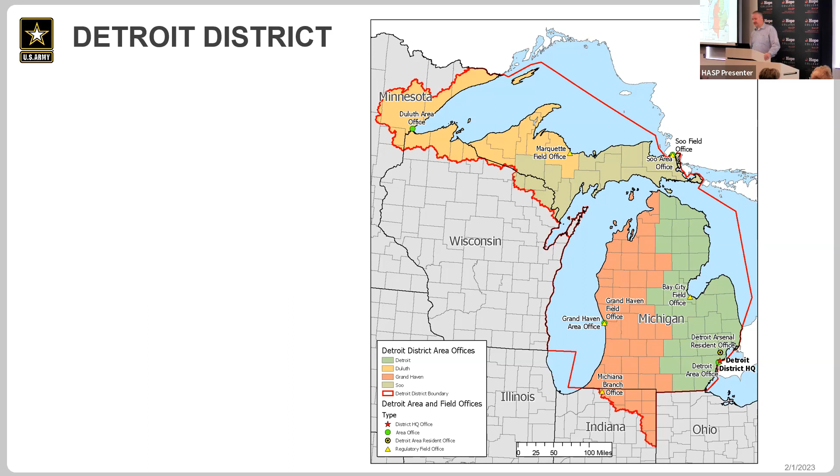We have an office in Bay City, and Sault Ste. Marie, if you've ever been there, the Soo Locks facility - that is the Detroit District's largest project, and I'll have a little bit more on that later. We have a large field office up there with about 100 plus people at it. We also have an office in Marquette, Michigan, and then Duluth, Minnesota.

Before I get into missions, I want to talk about how the Corps of Engineers is able to do work. In order for the Corps to get involved in a project, we need an authorization from Congress. So Congress comes out with bills, for the Corps of Engineers, about every 2 years.

A Water Resources Development Act is developed, and within that are laws that allow the Corps of Engineers to do work. It doesn't reset everything when the new WRDA comes out - it adds on to the existing laws that we have. They could strike through and say this law is no longer active and here's the new one. But typically, we'll get a few new authorizations each year under that Water Resources Development Act.

I'll give you a quick example. Within the state of Michigan, the Corps of Engineers had an authority to assist with combined sewer separation. If you're familiar with sewers, we have sanitary sewer, which is when you flush your toilet, it typically goes down the sanitary sewer, and storm sewers that carry rainwater. In combined systems, the sanitary and the stormwater are all combined into one system. So when you get a large rain event, that water could dump out into your rivers and ultimately your Great Lakes.

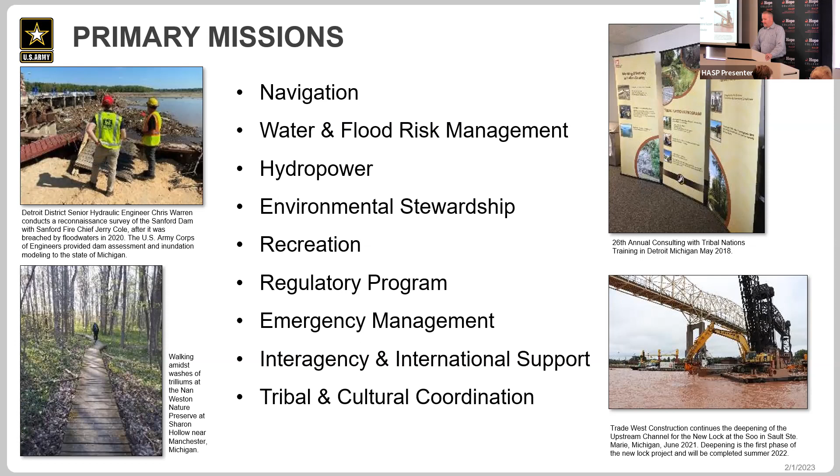And then, last but not least, cultural and tribal coordination. We work a lot with tribes and the state historic preservation offices and folks like that to make sure that the projects we're doing are not impacting those sensitive cultural and tribal properties.

All right, I'm going to start zipping through here—I think we've got about 5 minutes left already.

All right, so navigation—I'm not going to get into this, John's going to talk about this quite a bit, but there are many harbors along the Great Lakes. Again, when we dredge these, it's by an appropriation from Congress. So we have standing authorities to dredge all of the federal harbors, but we don't dredge all of them on a regular basis, because Congress appropriates funds for those typically based on the amount of commercial traffic coming through, or those large freighters that you see. I'll save the rest for John.

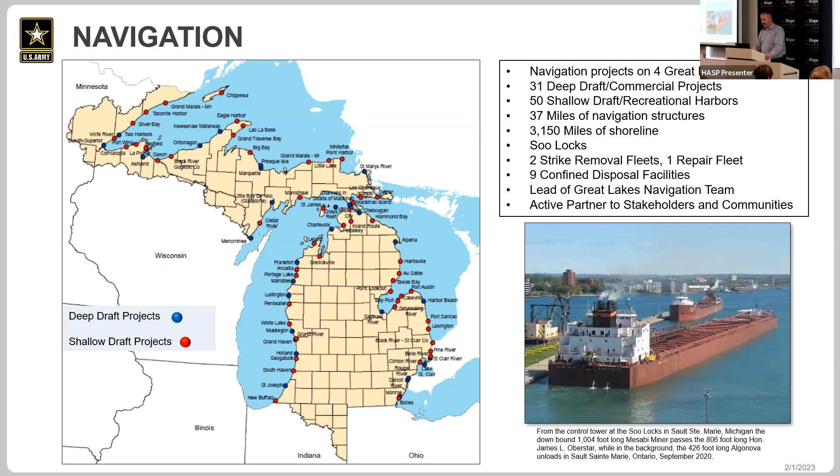Again, flood risk management, I kind of hit on this. We do monitor and forecast water levels on the Great Lakes, so if you're interested in what those levels have been and where we think they're going, you can look at our website and there's information on water levels there.

We also get into inspecting levees and flood protection projects like that. Under our flood risk management program, we also have the ability to construct new flood risk management projects. A lot of our projects, in order to qualify, have to be economically justified—so we're not going to build a levee to protect a park that's flooding. There would have to be a lot of homes or larger public facilities impacted in order for the Corps to have justification to construct a project like that.

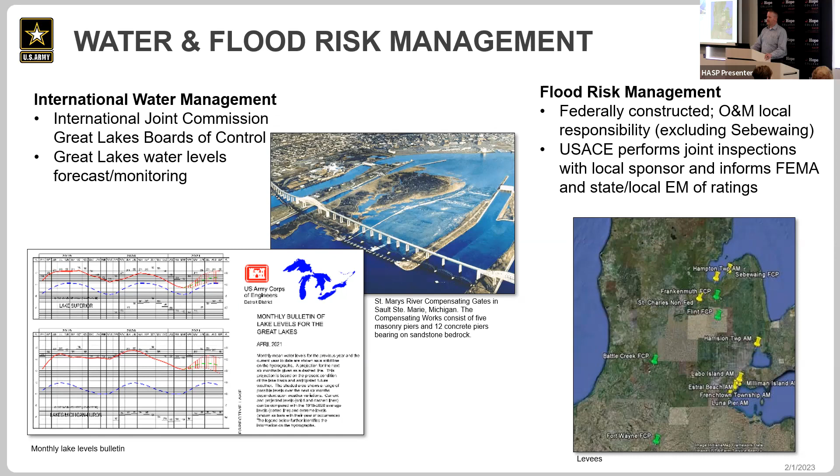All right, I mentioned hydropower—up at the Soo Locks, the Corps of Engineers actually has a hydropower plant. This plant provides 100% of the power for the Corps to run the Soo Locks up there. If you've ever been up there, it is a large, impressive facility that manages the freighters going from Lake Superior down to Lake Huron. If you get a chance, go swing by.

It is really cool, and outside of that 100% that we use for the Soo Locks, it supplies 20% for the rest of the Upper Peninsula as well, the Eastern Upper Peninsula. And yep, it's the oldest generating unit in the Corps of Engineers' inventory—it's been online for almost 100 years now.

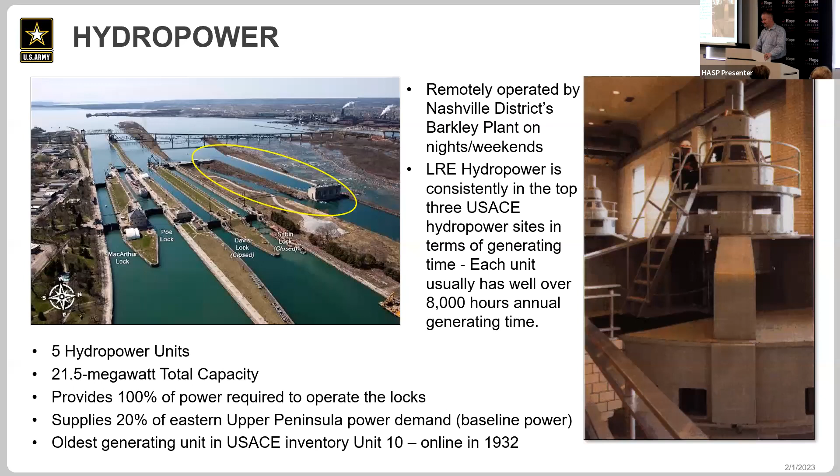I mentioned environmental stewardship. The Corps of Engineers does a lot of ecosystem restoration projects. We also partner with a lot of other federal agencies to help them with their ecosystem restoration projects or sediment cleanup. We work a lot with the Environmental Protection Agency on sediment remediation projects. You had an area of concern in Muskegon here. We work closely with them to execute several projects that removed contaminated sediment from the lake and the tributaries going into the lake. So, big mission there.

We also are involved a lot with invasive species. We do sea lamprey traps down in the Chicago area. We have a large facility that helps keep the invasive carp out of Lake Michigan and the Great Lakes. And right now there's electric barriers, and they're in the process of constructing a larger barrier that will be more permanent than the electro barriers that they have currently.

We coordinate a lot on federal endangered species. On all of our projects, we're required to do that with Fish and Wildlife Service. So we've also constructed habitat for piping plover on purpose and on accident. We built a facility up in Green Bay, we call it the Cat Island chain. It's a dredge material management facility, but it also protects a large wetland complex. The first year we went and placed material in there, it was sandy material, and an endangered species, the piping plover, showed up year one and has been there ever since. Awesome story. It presents some challenges as far as our operations go, because now you've got to watch out for the birds, but really cool story and something we try to highlight.

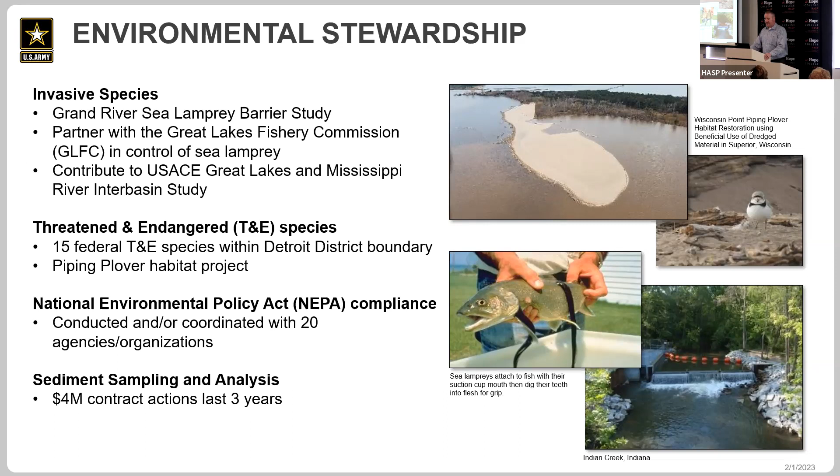Just again, we do a lot of compliance under the National Environmental Policy Act. Every federal project that we're involved in is required to have NEPA compliance. And then we do a lot of sediment sampling and analysis as well.

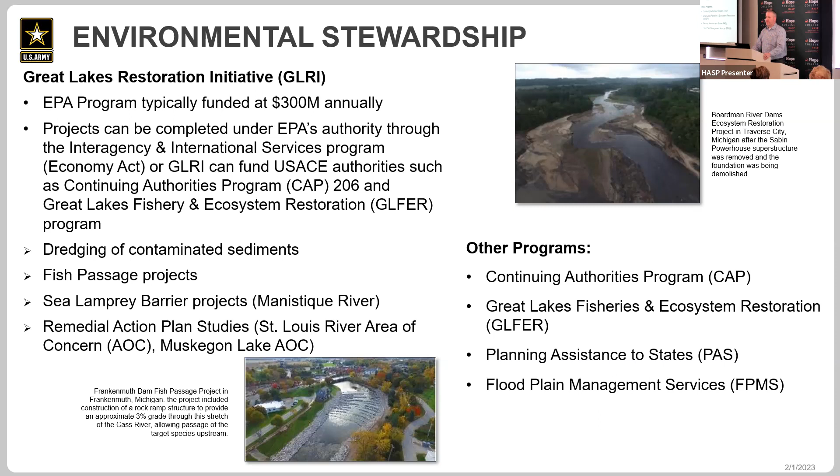I mentioned Great Lakes Restoration Initiative and our work with EPA, won't get into that too much more. We have a couple other programs that help with removal or restoration of habitat. We've done a couple dam removal projects under that, one in Frankenmuth. We've removed 2 dams up in Traverse City on the Boardman River. There's another one kind of in the works up there. And we have several other requests in Boyne Falls, Portage, Michigan. There's a few floating around out there, in Lansing, Michigan, that we're hoping to get funded to remove. So we'll see where those go.

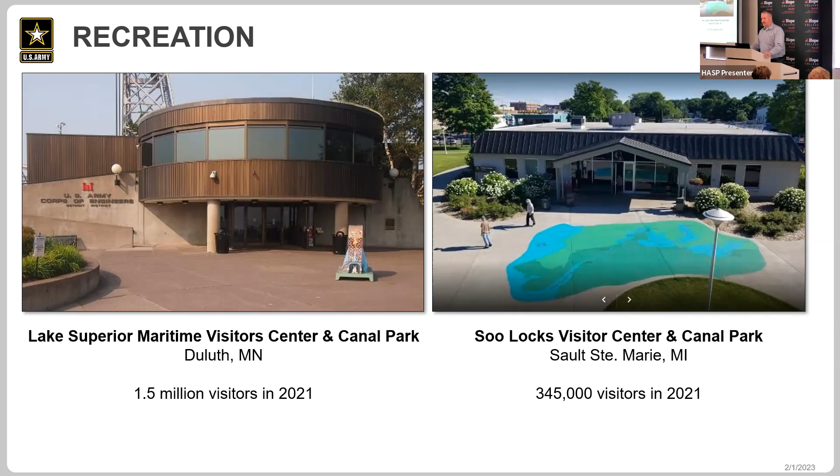I mentioned recreation. We do have 2 visitor centers at the Corps of Engineers. If you're ever up in Duluth, we have a maritime museum up there, a really cool little spot right on the lake, right by the lift bridge. If you've ever been to Duluth, there's a large lift bridge there. Definitely recommend checking that one out. And then up in Sault Ste. Marie, the visitor center at Canal Park, and I believe that's a spot where you can watch the freighters come through the lock.

Regulatory program, I'll hit on this real quick. I mentioned that we authorize or evaluate permits for work in the Great Lakes and waters of the Great Lakes. We look at permits under over 2,700 miles along the lake and all waters in northern Indiana. So jurisdictions are a little different. I won't get into that too much, but the state agency here in Michigan has kind of taken over the inland areas so that there's not duplication of federal and state actions. They've kind of taken in our program and administer it.

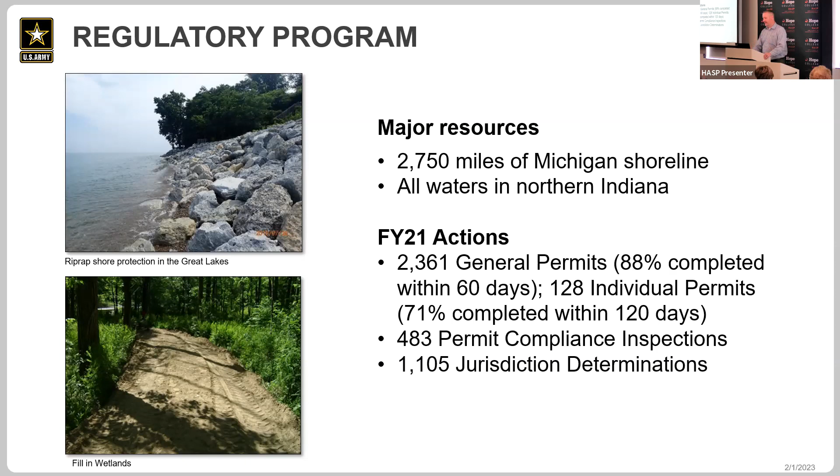Just some quick numbers on the number of permits: over 2,300, and this is in 2021, I apologize, these aren't updated. 2,300 general permits, those are usually ones that happen really quick in about 60 days, and then over 125 individual permits, which take a little longer. They require public notice and things like that prior to being authorized. And then we also complete compliance inspections as well as jurisdictional determination, and that's essentially, do you even need a permit? So if you're on a Great Lake, you need one. If it's inland a bit, on a waterway, a lot of times there's some other circumstances that we would look at.

I mentioned emergency management. Most recent example, when the water levels were high here in the Great Lakes, we went out and did a lot of sandbagging. Detroit, South Haven, we had some HESCO barriers. I think that picture up there in the top left is South Haven. They were getting water when the winds were coming out of the west. They were getting water blowing up into their water treatment facility, which is kind of right by their parking lot there.

And so we put some HESCO barriers up to kind of stop that water from coming in and impacting their facility. We also support the nation in hurricanes and other national emergencies.

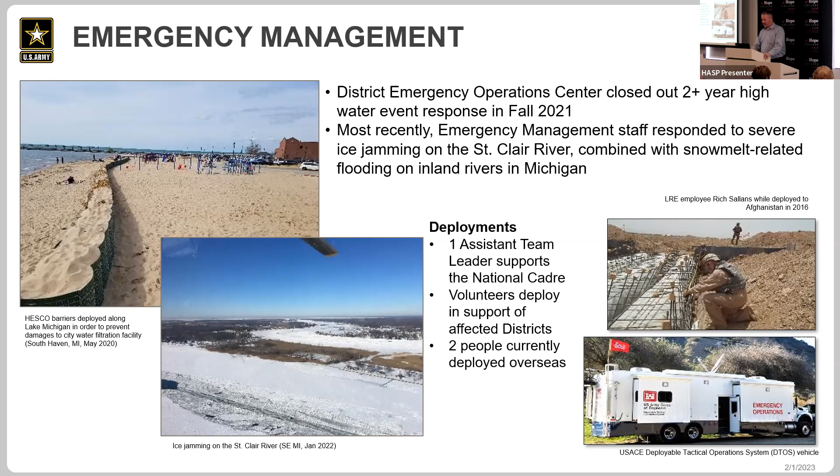The Detroit district did work directly with FEMA and the state of Michigan to construct 2 alternate care facilities during the COVID crisis. We built one at Cobo, and this would be to handle people that got sick if the hospitals were full. So one in Detroit at Cobo Arena, and then another up in Novi at the convention center there. Luckily neither facility was used very heavily, but for a week or two there, it was looking kind of scary.

I mentioned this already, a lot of work with other agencies to support their projects. We work with the Army Reserve Center. We've done some projects at Selfridge, most recently a flood study for them because they're right on Lake St. Clair and vulnerable to flooding.

And tribal and cultural coordination. Again, we work a ton with tribes. They have a lot of needs, a lot of issues on some of their lands with flooding and wild rice, things like that they historically have relied upon is kind of disappearing with changing conditions in the climate and their habitat. So a lot of studies to figure out how we can restore those types of things and reduce flooding and impacts on their land. We also coordinate with them on a lot of all of our federal projects as well.

All right, so just a quick highlight on some of the projects that we have been involved in recently on Lake Michigan. In Muskegon, we were working with EPA on the area of concern there. That work has recently wrapped up, but we're still supporting an EPA Superfund project at Ott Story.

We have a flood study going on up at the Torch Lake Elk Lake River system up near Charlevoix. They were having some flooding issues up there. Corps of Engineers going in and doing some hydraulic modeling and things like that to understand why they're having their flooding and if there's any potential solutions. And then those are both funded.

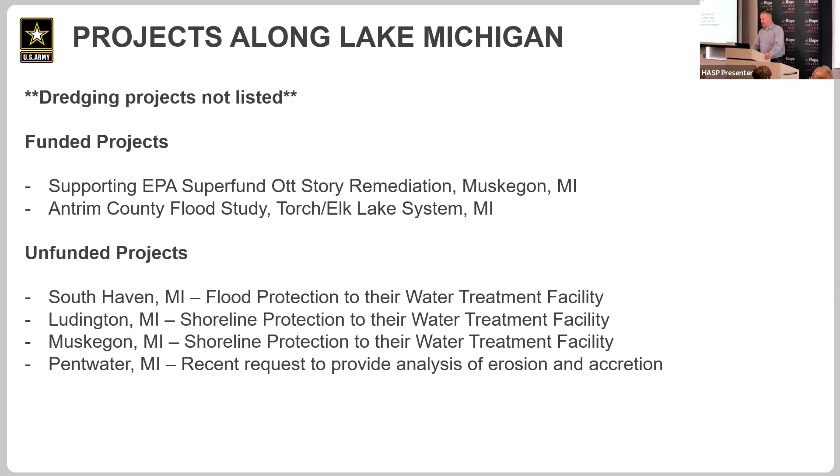And again, wanted to highlight real fast, I mentioned the Soo Locks quite a bit. So we had an authority on the books for 30 or 40 years to construct a new lock up at the Soo Locks, and essentially the point of that is redundancy in the system. Right now, I believe it's 95% of the iron ore for the entire United States goes through the Poe lock, which is the existing lock we have.

That one's currently in place. The fear is that if a boat runs into that gate, or something happens to that lock, there's a mechanical failure, we can't transport iron ore throughout the United States. There's no other alternate means of transportation. And so in the last few years, we've gotten an appropriation from Congress, I believe it is about $3.2 billion now, to construct a new lock so that we can have that redundancy in the system and not worry about failure, which would cause massive impacts to the U.S. economy.

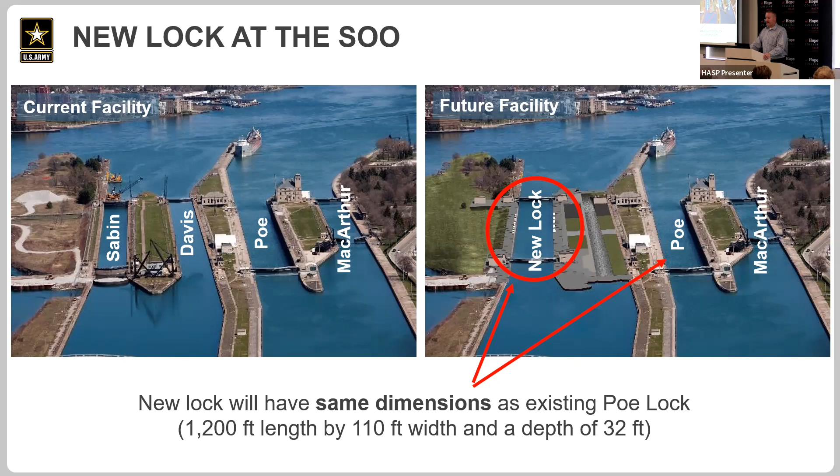So the picture on your left is what it looks like currently. They're going to demolish the Sabin and Davis lock and create the new lock in that area. Those Sabin and Davis are currently unused. And then the MacArthur is going to stay in service. It's a smaller lock, so it can't fit those large freighters that haul that iron ore. So that's really the most important project that we have going on right now. I don't know if it's the largest project in the country, but it's right up there. Super important stuff going on up there.

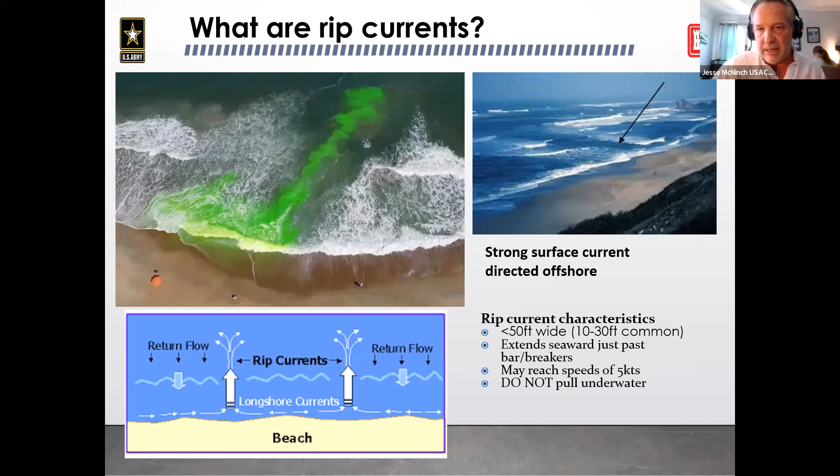They're quite strong, and they typically extend from about the shoreline to out past where the breakers are, where the waves are breaking. They do not pull you underwater, but often what happens, we believe, is that people are caught in the rip currents. They are pulled seaward, and they try to swim directly against it, and just eventually become so fatigued from that effort that they end up inhaling water or getting in distress from that.

So some statistics are really, how dangerous are they? In this day of COVID and all those numbers that we all looked at over the last few years, I think numbers sometimes can be almost paralyzing. But I did want to put this out just to give you a measure of it.

Because when we look at the statistics of fatalities related to weather and ocean related fatalities, it's significant. Here's a table that shows the deaths associated with, on average, cyclones or hurricanes, bushfires, floods, our scary favorite, sharks. So rip currents way exceed that. It's really, in terms of weather and ocean related fatalities, second only to deaths related to heat related or heat strokes.

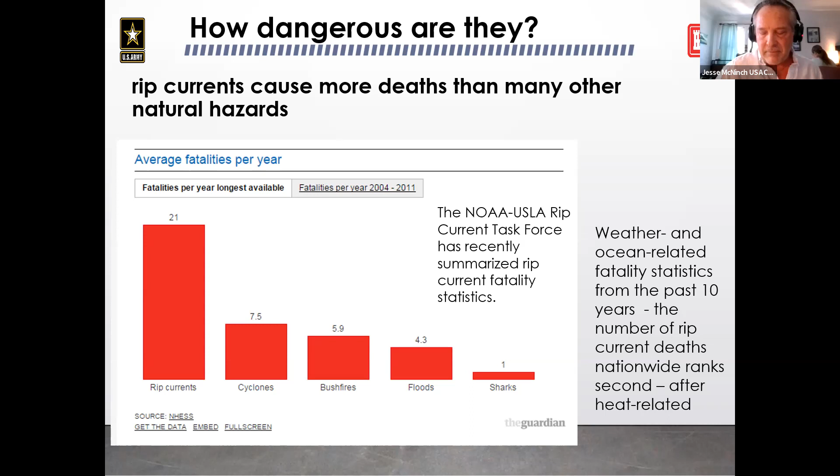And the U.S. Life Saving Association estimate that it exceeds 100 a year.

So what causes them? Part of my hope is that as we talk through and explain our understanding, we have lots to learn, but if you understand the basics of what creates them, I think it helps prepare on how to avoid them, which we'll get into next.

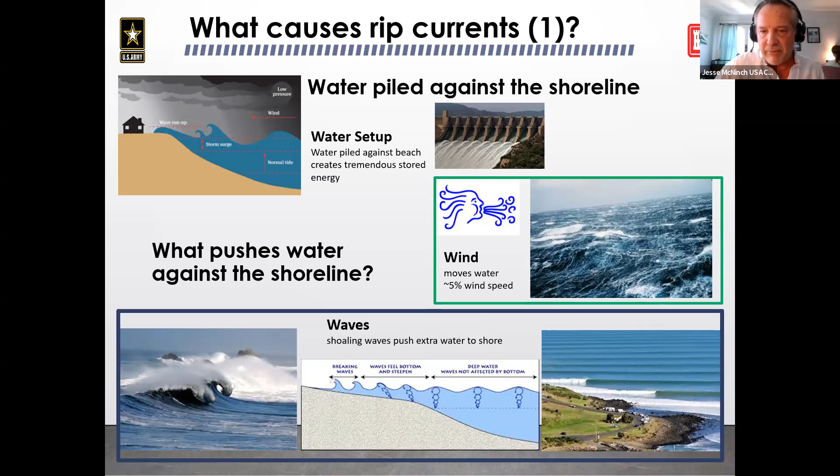The second part I wanted to explain is the water piling up or setting up against the shoreline, like I just described. Here's the diagram I showed before, the beach looking top down, like a map view. You have the beach here, and the water being moved by either winds or waves piles up against the shoreline. The rip currents flow offshore from that, but the other factor we need to consider is the alongshore currents, shown in these bottom images.

This lower left-hand image is an example as if we were in a balloon just offshore. This yellow area is the beach. We're looking back towards the beach, and these white things are the crests of the waves. You'll see they're approaching the beach, hitting this area of the shoreline before that area, so they're approaching at an angle. You can see it nicely in this aerial photo of a beach with a pier sticking out, showing how the wave crests approach the shoreline at an angle.

What's key is that the strength of the current that flows along the shoreline, parallel to the shore, is driven by two things. I put this in for any of the math geeks in the audience. The strength of the longshore current is a function of how high the waves are when they're breaking, big tall breaking waves, and what angle they approach at. As the angle steepens, say up to 45 degrees, that increases the magnitude or strength of that flow.

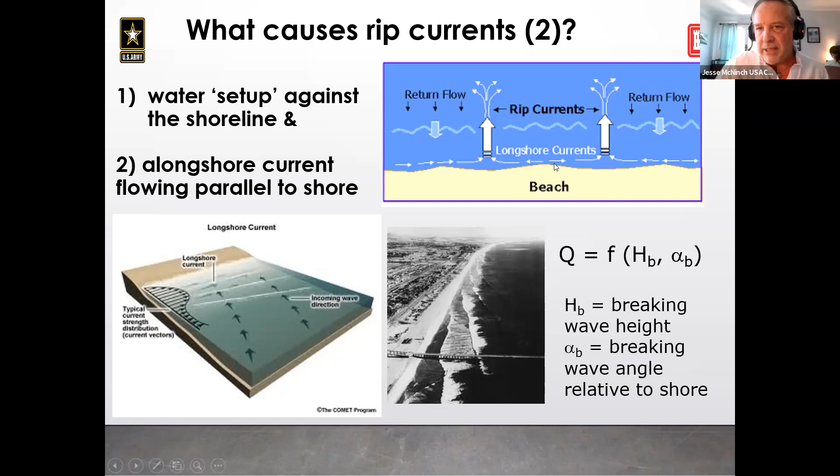So water is being piled up against the beach, and it needs to squirt out. It needs to balance itself, just like a dam piling up or holding water back. You also have this alongshore current flowing along the beach. Those are the two factors that explain how to avoid rip currents and what to look for. I put up three factors to know where to look for them, connecting back to what we just talked about: what they look like, and when to look for them.

The first piece is where to look for them. Going back to our dam example, with a longshore current, if we were all standing along the shoreline of this old broken-down reservoir, we'd all be able to point directly to where the strongest flow would be, where the dam is crumbling, where there's an avenue for this water or head to flow out. That's really similar to what happens with rip currents.

Back to our diagrams, this is a side view, offshore with waves flowing towards the beach from right to left, shown going over an underwater sandbar. Many of you have been out on the beach with your kids, or you were kids yourselves, wading into the water down to your knees, waist, maybe your chest. Before that, you'll often crawl up onto an underwater sandbar just offshore of the beach, which is very common.

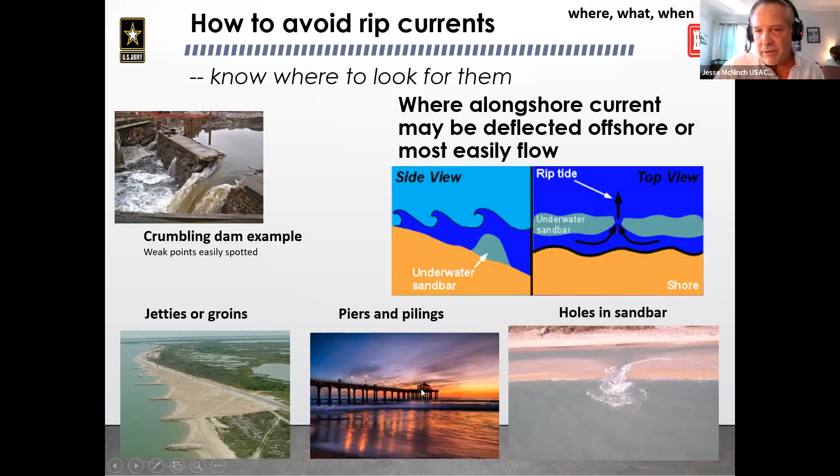So what should you look for? I'm showing some pictures, and I think when you all look at them, I know I look at them and say, oh, that's pretty easy to see. But I want to make the point that I'm giving you the very best images I've been able to pick up through my career. You'll notice almost all of them are from higher elevation, because you're looking down and can see it. It's much more difficult, even to the trained eye—even lifeguards and others—to necessarily see these features when you're standing on the beach.

But what you hopefully can see or look for are plumes of sediment. Here's a great example: this colored area I'm showing with the red arrow on the upper left-hand side—that's sediment suspended from the bed, the lake bed or seabed, being carried out past the breakers seaward. So you'll see these plumes. Here's an example of foam created from waves breaking, carried out. Here's a combination of both sediment plume and foam being pulled out. When you're standing on the beach, it's harder to see than when you're elevated like this. But if you're able to pick up any areas with plumes of either murkier looking water or foam, that is a telltale sign of a rip current.

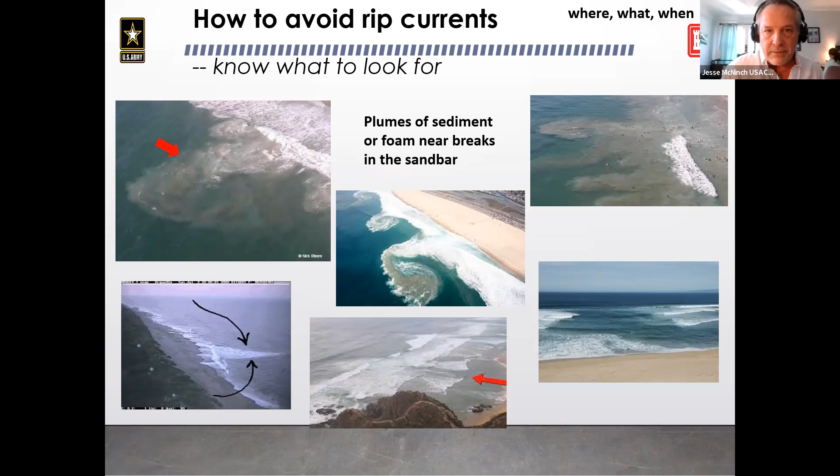The other thing to look for are these same plumes of sediment or foam, but near structures. Here are some examples I've collected through the years. Here's an old broken down groin—it was basically a seawall going from the beach towards offshore, and you can see, hopefully your eye can pick out, the plume of foam that shows the outline of the presence of that rip current. Here's another, from down in Puerto Rico—nice fine whitish sand picked up and shown in this plume.

The other thing I want to point out is, if you see the structure, it doesn't necessarily mean the rip current is going to be right beside it, because several things are happening—and I could go into more detail, but we have a time limit. You have the water piled up against the beach, but you also have that longshore current flowing, in this case from left to right, which is also piling water up against this structure. So the most hydraulically efficient area for that water to be released and go seaward is not necessarily right up against the structure, but just off a little bit.

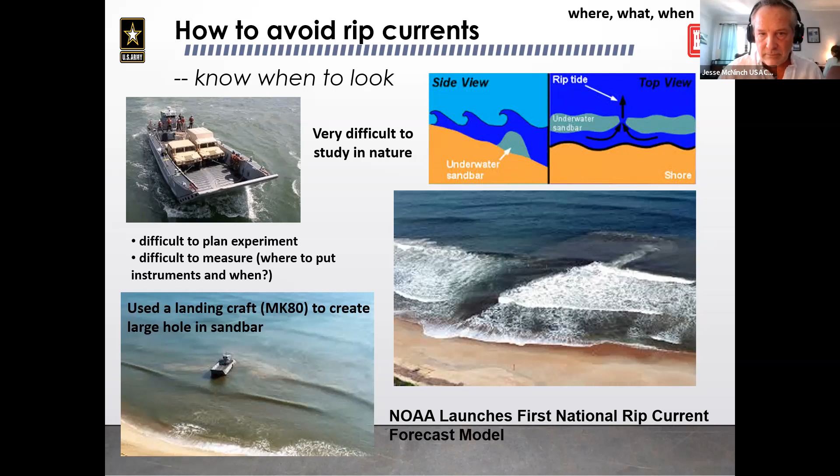This last part I'm probably most excited about, since we've been involved for quite some time. I mentioned earlier how our work supporting the military sometimes overlaps and provides an interesting sidebar for civil works, in this case public safety. What we're working on right now is a system that uses very inexpensive over-the-counter radar, the same kind you'd put on a fishing boat to go offshore.

We use this over-the-counter radar to actually hunt and look for the current occurrence of rip currents, as well as to locate the holes in the sandbars that are conducive to rip currents forming. So while NOAA provides a forecast of when you might expect rip currents, we wanted a system lifeguards could use to predict exactly when they happen - the corollary being there's a tornado watch, and then ultimately a tornado warning, so you know when and where it's actually occurring. This is the when-and-where, the tornado-warning side.

There's a lot here, and we're excited about many applications, both military and things like sediment transport, accretion, and erosion. But focusing on rip currents, we discovered that X-band radar can see the foam and waves very clearly. This image in the lower right is our actual waves moving across the surf zone in real time, washing up along the beach.

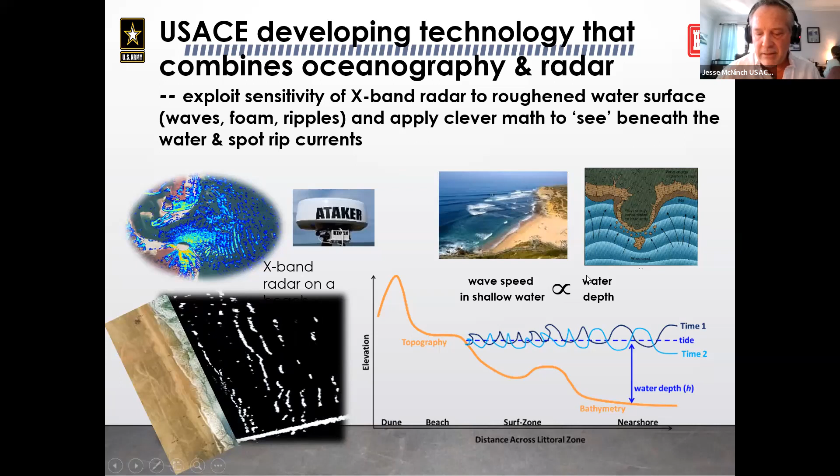We're able to use math and some clever relationships, and we know that the waves are influenced by what they feel underneath them. So I'll show you an example of that. This is one of the things that happens oftentimes in research, where you're focusing on something and you're actually surprised at the results. What you're looking at here is an image on the upper left-hand side of Oahu.

This is Sunset Beach, Oahu. This actually made the news just last week with the big surfing contest, the Eddie, where they had massive waves hitting this region, and they had that surfing contest. I believe they were over 40-foot tall waves. Well, we were there with a very early model of our radar system.

Here you can see it on a little push buggy. We pushed this along the edge of the beach. This was a little walking boardwalk. The left-hand image is showing you two things: it's showing you the color represents where the sandbars are, or the shallower areas. The lighter, warmer colors represent shallower, and the cooler colors, the blue, represent deeper. So here is the beach along this region, and you can see the sandbar, and you can also see a little break in the sandbar.

The other thing I want to point your eye towards are these vectors, these black arrows. This radar system is not only looking for rip currents, it's not only looking for the sandbars, but it's also showing the direction of all the currents. These little black arrows represent the direction of the current, and you can see here that we captured one of these rip currents.

Probably the coolest thing I suspect you've all been staring at, because I know I stare at it whenever I play this, is the lower right image that's just looping through. What you're looking at is the white here that's the foam on the surface of the water. So the beach is this area, the little radar system is sitting here on that boardwalk, and what you're seeing is a real-time movie of what those surface currents are doing.

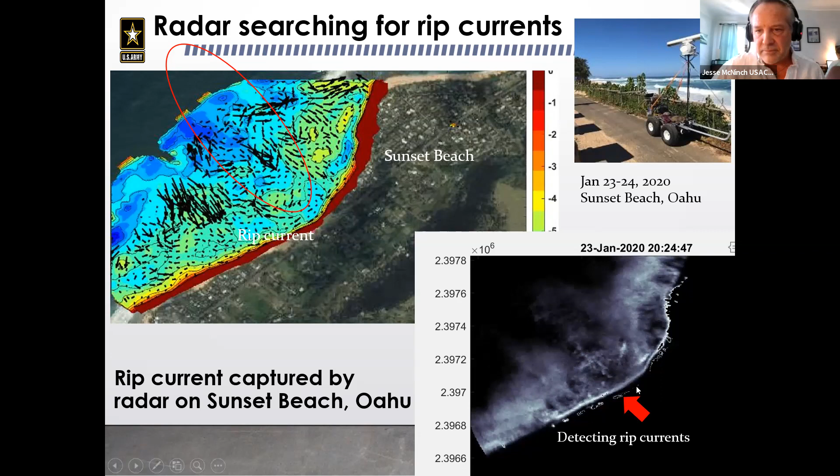So I spoke to this earlier, but just to wrap it up, one of the things we still have more work to do on - this is not an operational system. It's still an R&D system that we're developing at the Detroit district. But the vision is that potentially we could have these systems so that lifeguards could use them to patrol the beach in a couple of ways.

We could have dedicated stations if there's a beach or an area that's particularly dangerous or particularly busy during certain periods of the year. It would be fairly easy to have one of those radars there that's turned on every hour for lifeguards and other trained personnel to look for them. We also have these little radar antennas that can mount on a lifeguard's 4-wheel drive, so when the lifeguards do their hourly or every few hour beach safety inspection drives, that system could be turned on to look for it.

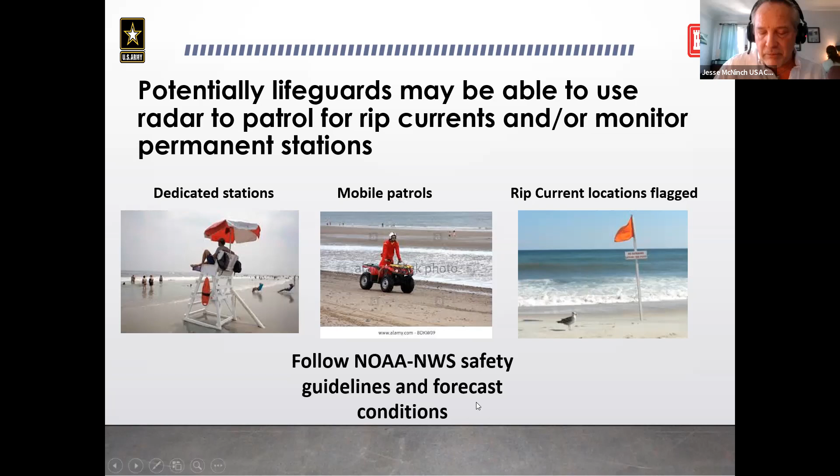And again, the other thought would be not necessarily just seeing where the rip current is, but I think it could also be used as a more fine-tuned way to forecast, because that same radar system would identify breaks in the bar where they might occur, and it could be flagged as an area of higher possibility of the occurrence of a rip. I do want to leave you, before we jump into questions, with this: I didn't focus on the actual guidelines of what to do, but NOAA and the National Weather Service have fantastic information online on how to respond if and when you are caught in a rip current. Be aware of their fantastic forecasting conditions that they provide.

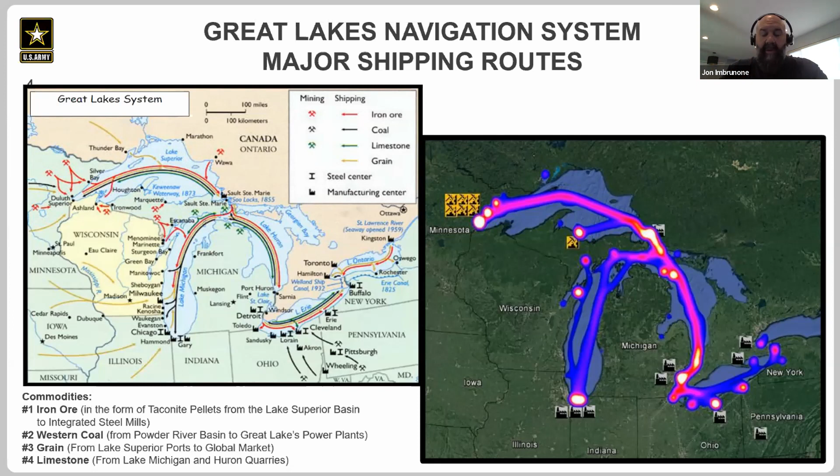The Great Lakes Navigation System is a nonlinear interdependent system that carries bulk commodities from source locations to users at the destination ports. The vast majority of Great Lakes nav traffic stays within the Great Lakes system and exchanges commodities between US ports or US and Canadian ports, but almost exclusively on the Great Lakes. There are some salties that come from foreign ports, but the vast majority, about 95%, stays on the Great Lakes.

Alternatively, ocean coastal ports primarily trade in containerized commodities, importing from and exporting to those ports overseas. Another key difference between ocean ports and Great Lakes ports is that ocean coastal ports really compete with each other for trade. If one port can't accommodate the traffic coming in, the cargo can easily switch to the next port because this is container traffic to be loaded onto trucks and rail and transported away from the port.

In the Great Lakes, commodities can't really be easily moved to the next harbor because the users, like power plants, like the one in Grand Haven, and manufacturing plants, are located at the destination harbor. In most cases, rail is not available there. So it really is an interdependent system where those high tonnage harbors really are dependent on those low and moderate tonnage harbors.

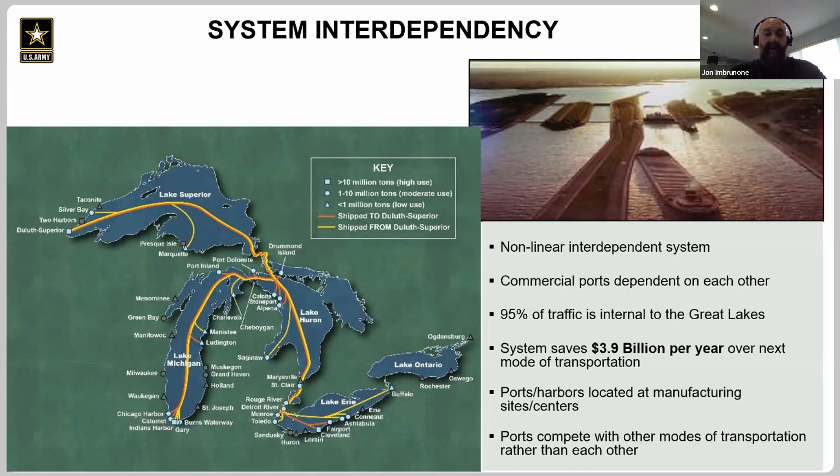Jim talked a little bit earlier about our Detroit area of responsibility. So within our Great Lakes system, the Detroit district operates and maintains 84 of the 140 federal projects, including deep and shallow draft harbors. The connecting channels are all within our district. We also operate and maintain 9 dredge material disposal facilities in our AOR. As you can see on the map, our AOR covers all of Michigan, the Lake Superior coastline of projects in Minnesota and Wisconsin, and the Menominee Harbor, which separates Michigan and Wisconsin.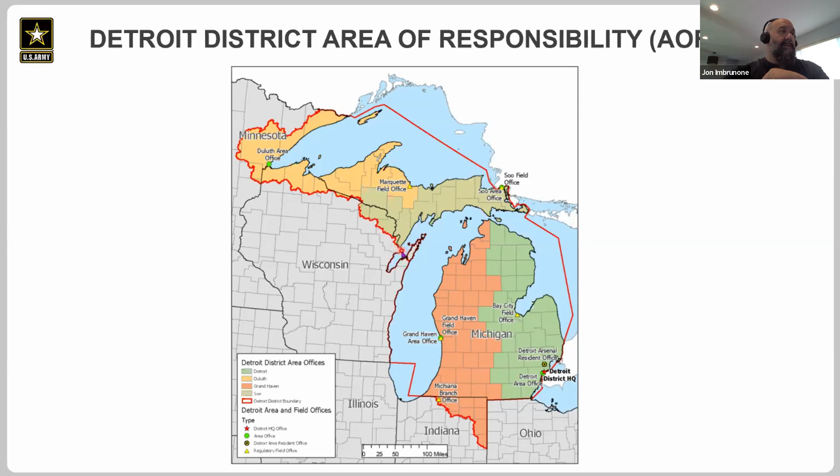So for the federal budget process, I wanted to give you just an overview of how we go about getting our funds to perform our operation and maintenance within the system.

So in general, our operations office develops and submits budget requests for all the federal harbors with an operation and maintenance need. The budget submissions are based on our asset management program, in which we assess the current condition, develop maintenance strategies for the life cycle of the assets—the channels, the navigation structures, the locks. And then we submit funding requests based on those needs, and those requests are ranked and blended within the federal regulation and guidance for the president's budget development.

Typically, the president's budget is focused on projects with high or moderate level of commercial navigation. For reference, high commercial use for Great Lakes coastal ports is at least 10 million tons of cargo annually. Moderate use is between 1 and 10 million tons annually, and low use harbors, or rec harbors as we often call them, are projects with less than 1 million tons of cargo annually.

This graphic shows the timeline in the budget cycle and how we are continually addressing these three stages. Each budget cycle lasts 34 months and includes three phases: budget development, budget defense, and budget execution. If you look at the chart between the two blue lines, which represents a fiscal year, in any given fiscal year we're executing the current year program while defending the next year's program and developing the budget for the program two years out.

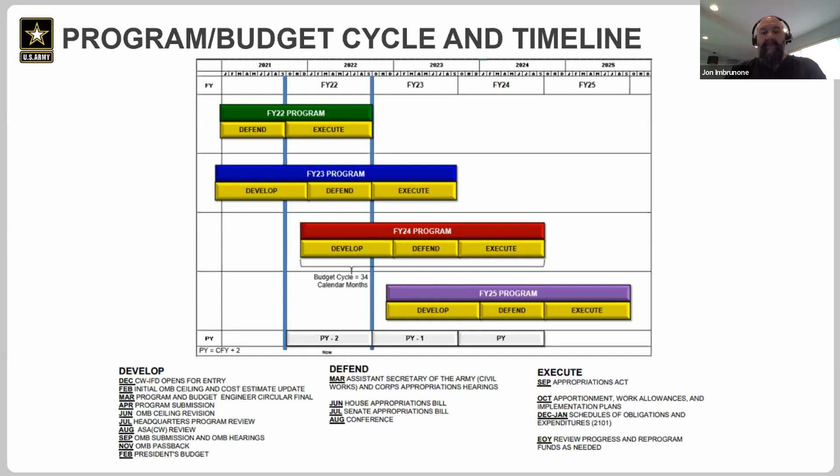Looking at those different phases, just a reminder that we're always referring back to the current fiscal year. Our current fiscal year is 2023, so current fiscal year plus 1 is '24 and plus 2 is '25. The budget development phase of the cycle is built for the current fiscal year plus 2.

During budget development, we utilize our condition assessments and maintenance plans to develop work packages, and they're ranked within the district by what we feel is important. That's typically based on the state of the condition and how many users and stakeholders are being affected by it. We then merge those work packages within the Great Lakes navigation team, and those are blended within the division, and the division's packages are blended at a national level. Those programs are submitted to Washington in support of the administration's president's budget request to Congress.

The budget defense phase, conducted for the current fiscal year plus 1—during this phase federal agencies respond to inquiries and data calls to House and Senate budget committees to develop the budget resolution, which is voted on by Congress and then subsequently approved by the president. The last phase of the cycle is budget execution, and this is what happens during the current fiscal year, where the districts are responsible for carrying out the work that was appropriated by Congress to conduct our operation and maintenance of the federal projects.

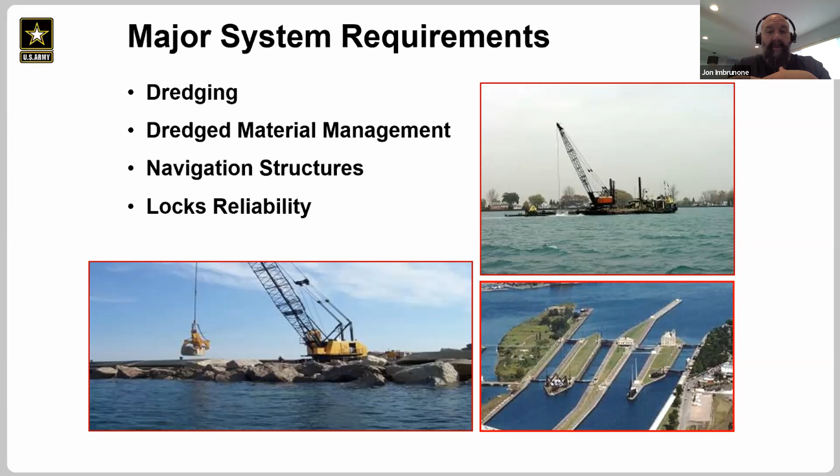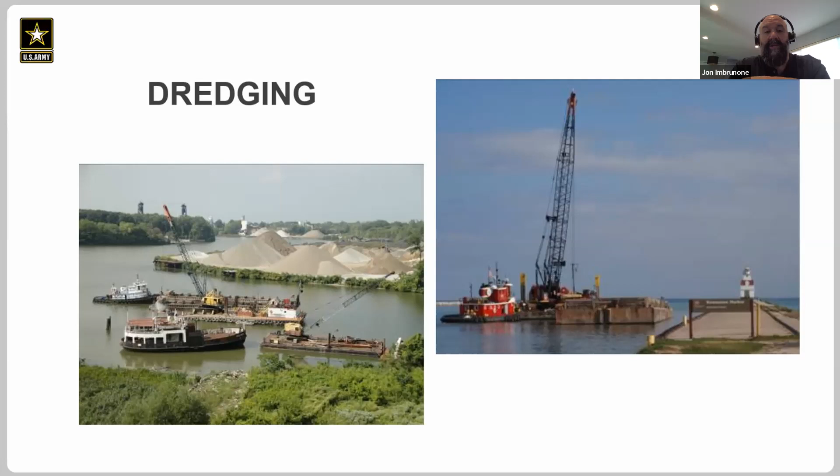Our requirements of our nav system can really be broken into four major categories: dredging, dredge material management, navigation structures, and lock reliability. Our most frequent O&M action is dredging of the navigation channel to allow for safe and efficient movement of commodities through the system.

On the Great Lakes, our annual dredging need is about 3.3 million cubic yards of sediment entering the system every year. In any given year we usually dredge 20 to 30 projects, removing about 3 to 5 million cubic yards of material.

Costs can vary pretty widely. Most efficient dredging on the very low end is about $4 a cubic yard. Higher end average is about $30 a cubic yard. Some smaller complex projects can range up into the hundreds of dollars per cubic yard. So you can see if we had 5 million cubic yards at over $100 a cubic yard, it would be pretty costly.

The cost of dredging projects are influenced by a lot of factors. There's environmental requirements to ensure proper disposal of contaminated materials. We need to avoid disturbance to fish spawning and negative impacts to other species. Like with Cat Island, the piping plovers showed up about 20 years sooner than we were shooting for. It was a great benefit of what we did, but it also created additional operational things we had to do.

Small and remote harbors often require large mobilization fees with low productivity rates. On the Great Lakes, we also have a very short dredging season. We have winter shutdowns, spring fish spawning and bird habitat, and in the fall we have waves and winds making the outer harbors unsafe. That leaves us really just the summer season to do most of our dredging, which also happens to be peak tourism season, especially in harbors like Grand Haven and Holland. You guys know there's huge tourism there that surrounds those structures.

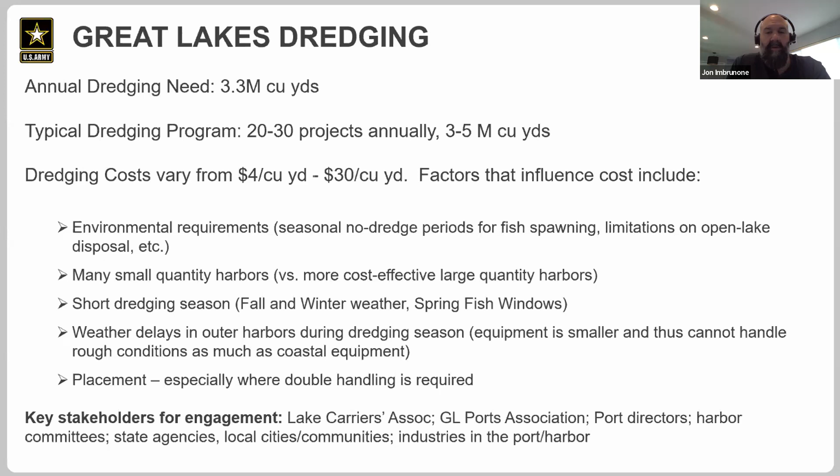Additionally, some types of placement can require multiple handling of material, where you transfer material from barge to truck and then truck to a disposal facility where you finally place the material.

Dredge material management: as a result of dredging being our most frequent O&M action, dredge material management, of course, is one of our biggest and most important challenges.

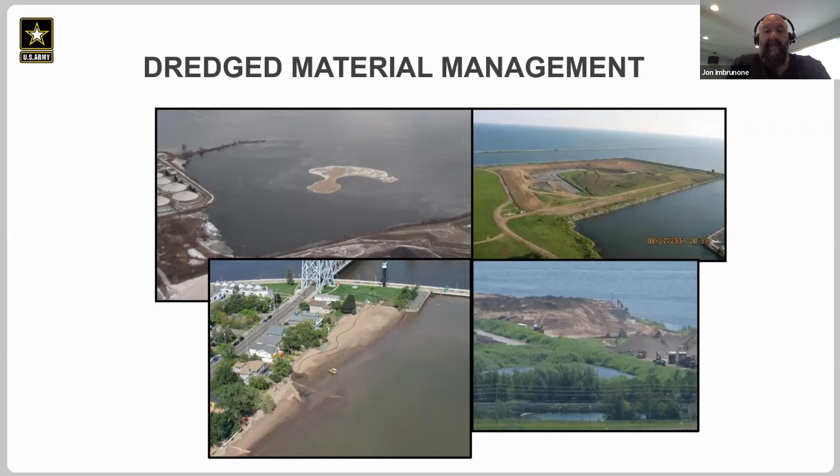Looking at dredge material management from a historical perspective, prior to 1970, nearly all dredge material was placed in the open waters of the lakes. In 1970, Congress passed the River and Harbor and Flood Control Act that specifically authorized the Corps of Engineers to construct, operate, and maintain spoil disposal facilities on the Great Lakes for the confinement of contaminated dredge materials. Most of the existing facilities were constructed in the late 70s, resulting from that act. There are currently 20 active disposal facilities on the Great Lakes, and they are at about 80% full.

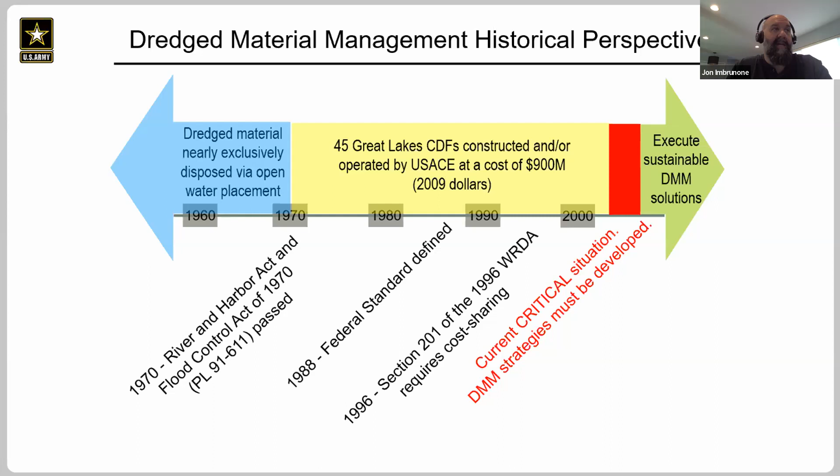As disposal facilities near capacity and sediment is becoming less contaminated, the Corps of Engineers is looking to develop more sustainable methods for dealing with dredge material, often by partnering with local entities for beneficial uses such as mineland reclamation, road projects, and fill material for contaminated sites. This is really going to be a major focus for the Corps of Engineers moving into the near future. It is a national problem, and it is becoming a critical situation.

Some of the challenges we'll be facing moving into the future for dredge material management include declining availability of placement sites and the prohibitive cost of constructing new facilities. Some of the later WRDAs created a cost sharing requirement for disposal facilities, so we have to identify a cost share partner. These are very expensive to build and take a long time to get authorized and constructed, so finding a ready, willing, and able cost share partner is a real challenge. Those cost share partners also have to take on the maintenance of that facility after it's done being filled, in perpetuity. So it's not necessarily the most attractive deal for folks.

There is also a general resistance to open water disposal among the states. There is a perception that dredge material is a waste product, which has been a perception about it for essentially forever. It's also hard to find suitable uses for the fine, silty, and organic materials that's often present in dredged material. When it is nice sand beach, or beach sand, we often can use it to nourish the beaches. We do that in Grand Haven and Holland, I believe Saugatuck as well. But that is not always the case for the inner harbors where it's river sediment.

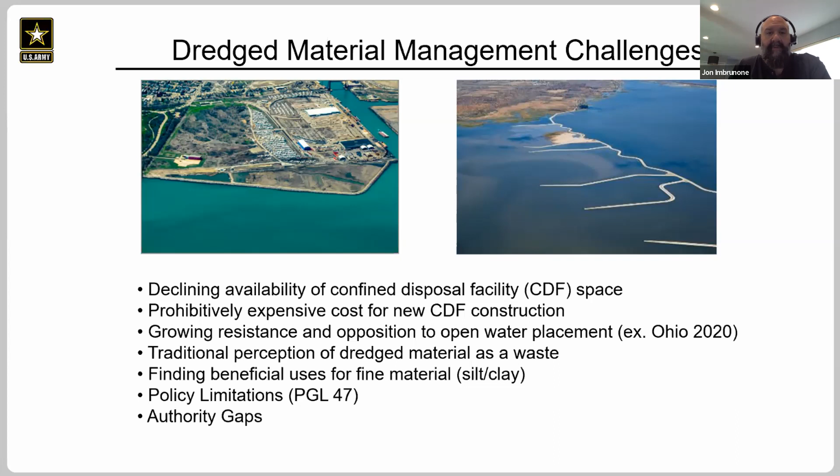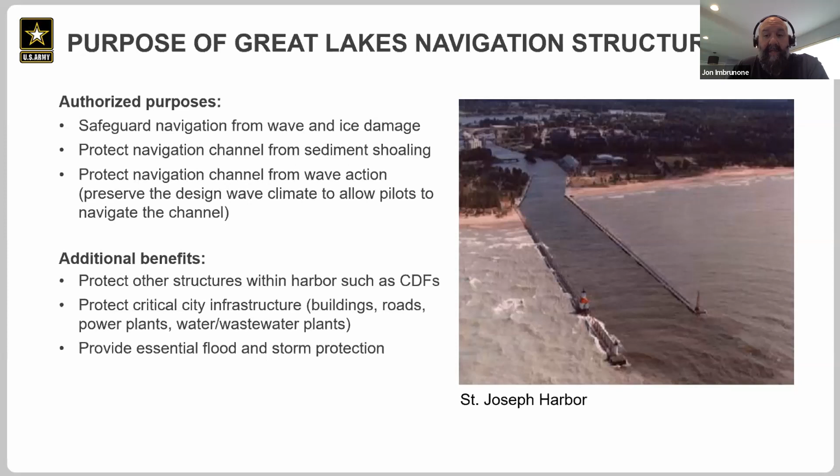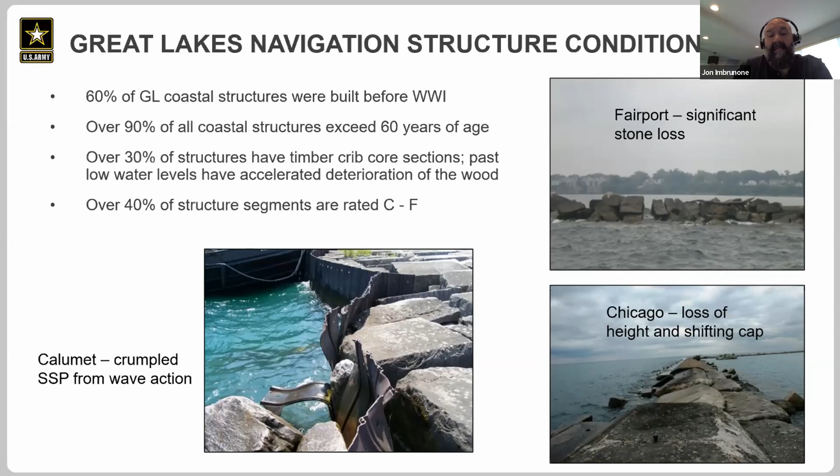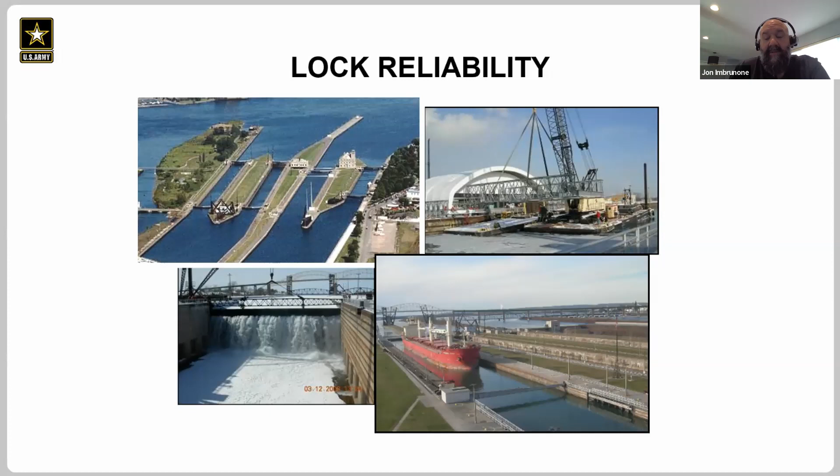The last area we're going to look at is lock reliability. It's critical to the navigation system to have reliable locks. In the Detroit district, we operate and maintain the Soo Locks in Sault Ste. Marie, Michigan. The Soo Locks are considered the linchpin of the Great Lakes nav system, because it's the only method of waterborne commodities to move from the lower lakes to Lake Superior, getting up to Duluth and some of the major iron producers to bring it down to the lower lakes. It is critical. We operate and maintain the locks as well as the hydropower plant there that Jim had mentioned, which provides power to the locks and provides about 20% of the power to the southeastern Upper Peninsula.

The federal government is making large investments to ensure reliability of this critical infrastructure. There's a lot of funding coming to asset renewal of the existing lock structure, making sure specifically the Poe, as the 1,000-foot vessels use the Poe, keeping that operational. It is over 50 years old, and we have very minimal shutdowns from the sheer effort of the folks up there, and these additional funding coming in to renovate and update really helps with the reliability.

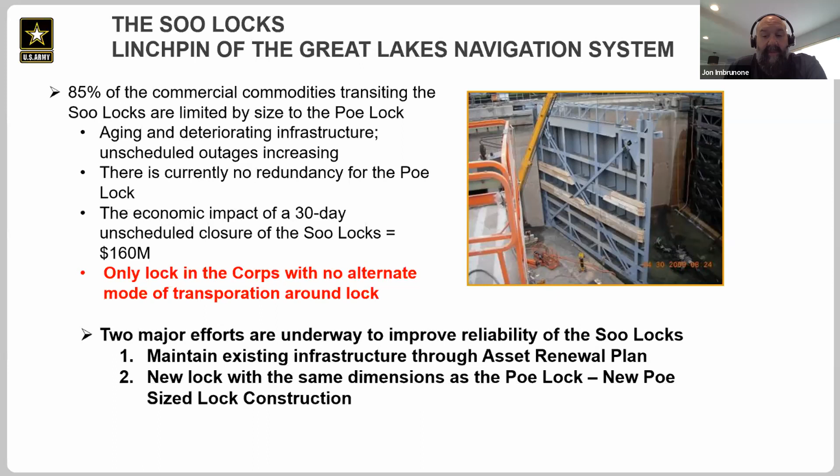But that being said, it is still one lock. Anything can happen, a vessel strike on the gate, or a mechanical failure. So that really led to the construction of the new lock that Jim had mentioned as well. Huge investment for the country, over $3 billion. It is a mega project, and it is going to be quite a benefit to the entire system, and that is under construction.

Lastly, I figured we would take a look at some of the local harbors you guys are familiar with, and talk a little bit about the authorizations there and the conditions there.

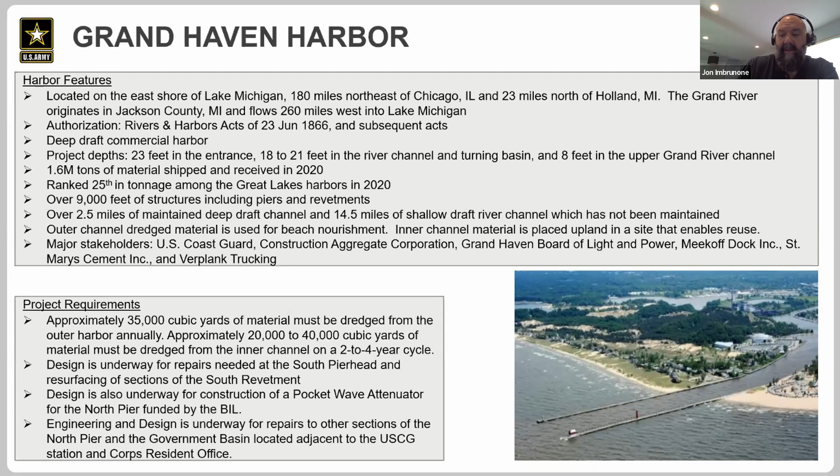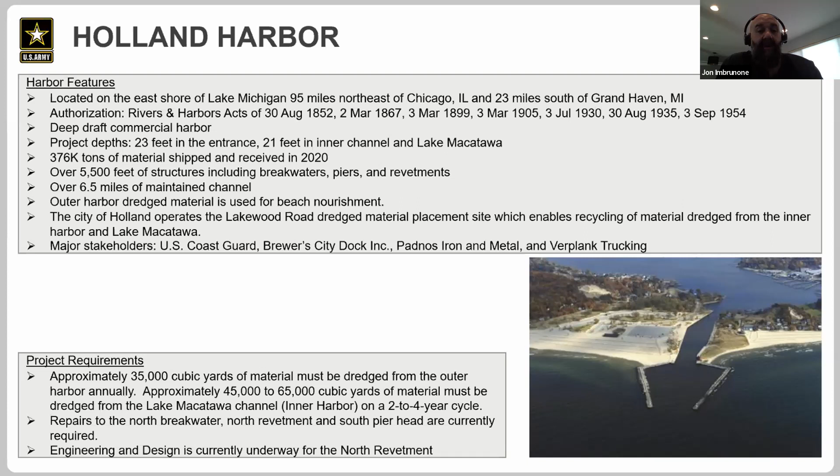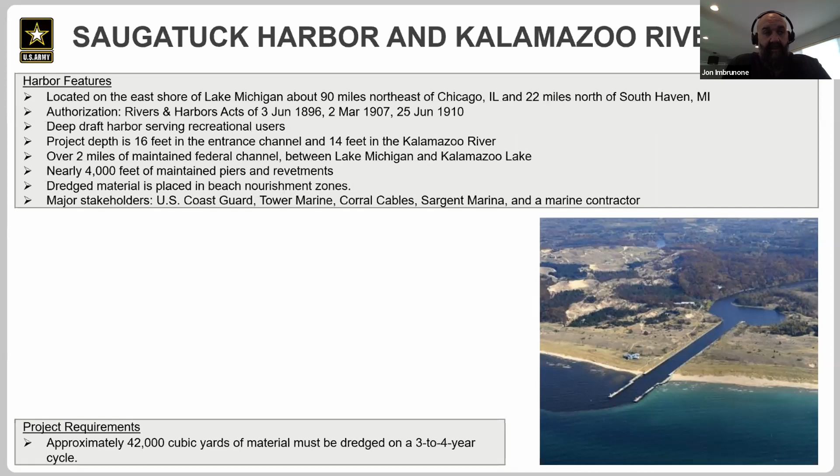Further down the coast is Saugatuck Harbor. Saugatuck has an authorized navigation channel and piers with pocket wave attenuators and revetments. Authorizations for this harbor date back to the 1890s. We dredge Saugatuck on a 3 to 4 year cycle, and due to somewhat recent renovations, the piers and revetments are in good condition, and we're not currently seeking any funding to do any repairs. Those are one of our better condition structures.